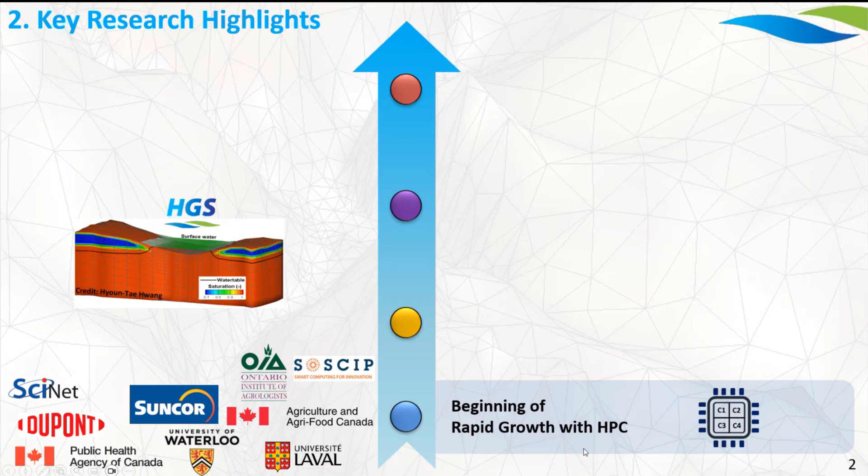This is my PhD work. It's been more than 15 years since I developed this parallel computing algorithm. At that time, we started to implement HydroGeoSphere in various real-world applications with large-scale models, such as the Canadian continental scale model. The complexity of the model was greater and greater, which required higher computational demand. So we needed to develop a more computationally efficient model by implementing high performance computing.

So we developed the parallel computing algorithm, which is kind of normal now, but at that time it was not that common. Now we are easily utilizing our computing machines with multi-cores.

The detail of this parallel computing is fairly simple. I developed a privatization scheme with array chopping that splits the matrix into the number of cores. Each core works on its own chunk of the matrix instead of using the whole matrix. That is what I call a privatization scheme with array chopping.

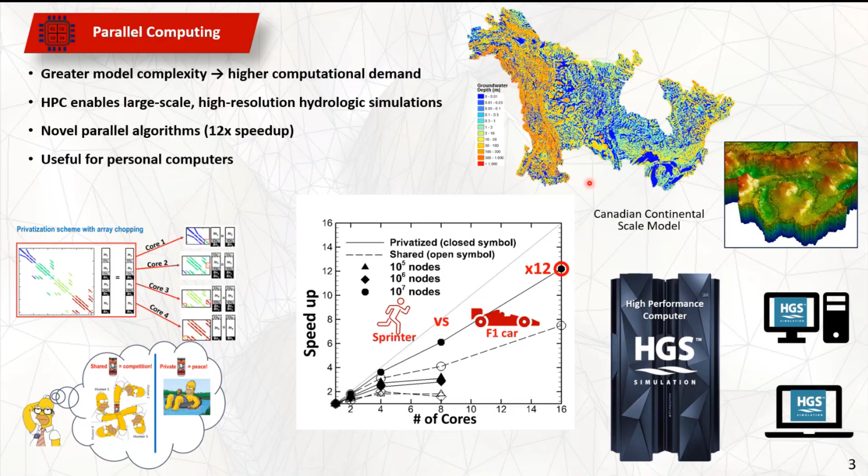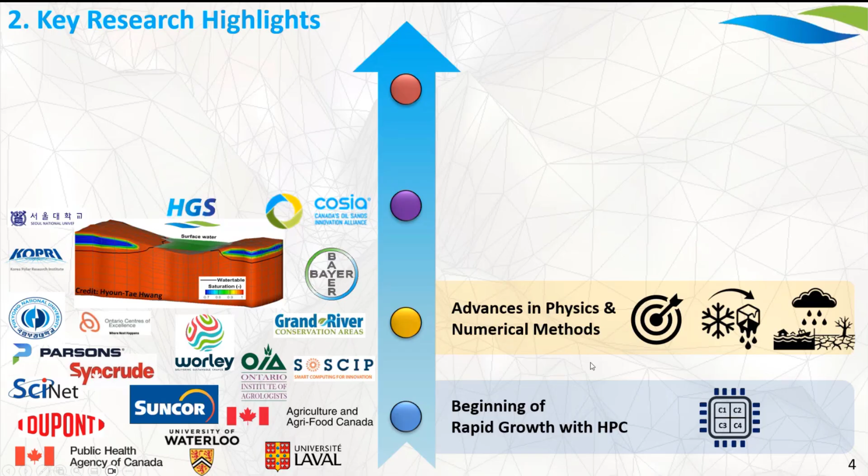So the next phase is to implement more physics and understand the detail of phenomena in nature. We advanced the physics and implemented additional numerical methods. The main examples are source zone identification, freezing-thaw processes, and climate change impact analysis.

First, we can look into source zone identification. We expanded the backward probability model to improve computing efficiency and accuracy of source identification. It was mainly focused on groundwater systems in 2D, but we expanded that to a 3D model with a variably saturated zone.

The backward probability model is literally opposite to the forward model. The forward model starts from the source zone - which we don't know - runs solute transport, and then detects the concentration at the monitoring well. The backward probability model instead starts from the monitoring well, where contamination is detected, runs the simulation, and traces back to the source or origin of contamination. This makes it easier to identify the source zone since we simply start from the monitoring well. But the forward model actually takes a lot of time because we don't know the exact solution.

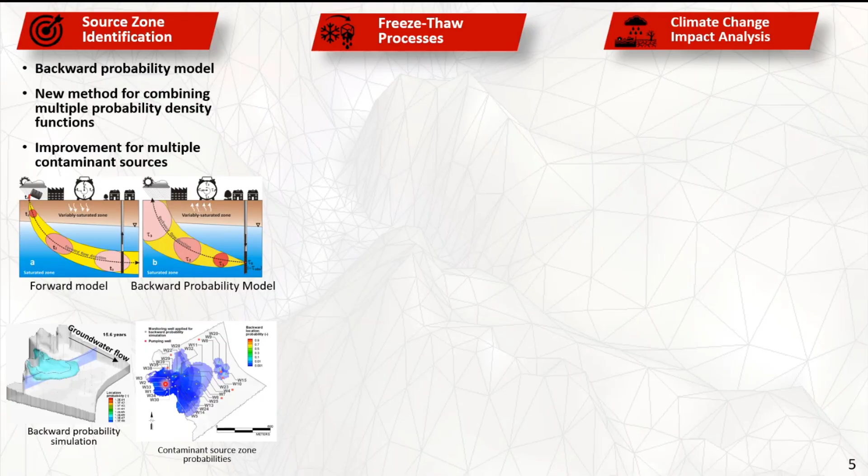This is one example of a backward probability model. You can see it representing the source of contamination and moving backward upstream, opposite to the groundwater flow direction. The final result is a probability map of the contamination, where dark blue and red represent high probability of the source zone. We can overlap multiple backward probability model simulations to identify the highly possible contamination sources.

Next is physical processes - unique physics we implemented for identifying active layers in Antarctica. The active layer is frozen during winter and acts as a groundwater aquifer during the summer season in Antarctica. This is a very important layer connected with surface water and groundwater systems in our cold region.

In order to estimate the active layer in Antarctica, we collected samples at Barton Peninsula, Antarctica, and performed lab experiments in the cold system. We calibrated this column test and then applied the calibrated model to Barton Peninsula, Antarctica.

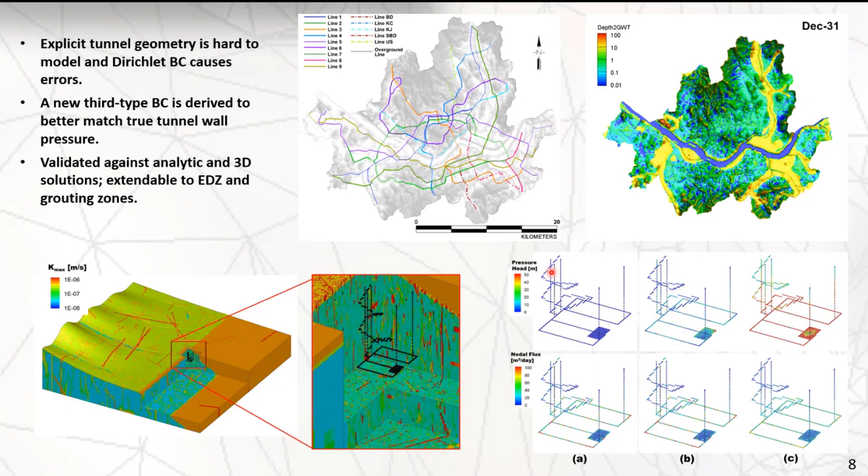The next example is nuclear waste repository construction. You can see these lines representing the tunnel boundary condition. These are tunnels leading to the nuclear repository system, this is the nuclear repository, and these are the tunnel pathways to it. This approach was successful in estimating groundwater seepage through tunnel, so they can prepare the drainage system and groundwater discharge system during construction.

The next example is water management. This time we develop for anthropogenic activities, which create new systems such as sprinkling, water distribution, and dam operation. These are not natural, so we need to implement new boundary conditions. To represent this water distribution system, we developed a boundary condition that links one boundary condition to another boundary condition.

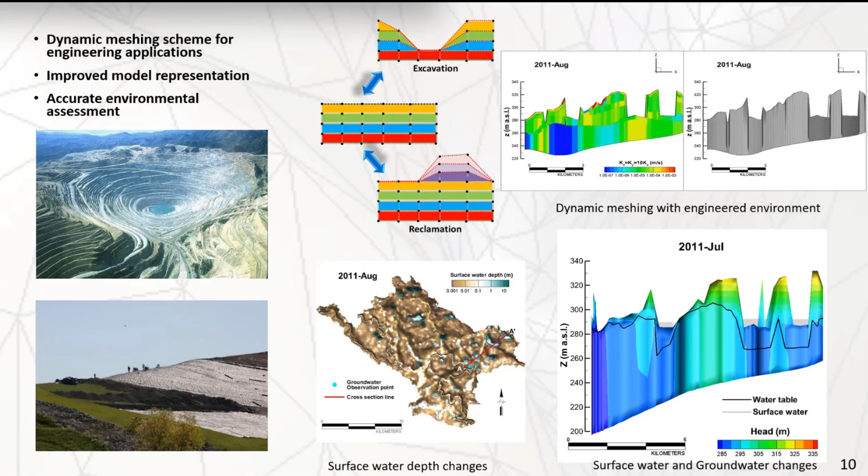And you can see the cross section of this area. Then you can see the dynamic interactions between the surface water and groundwater system during the excavation and reclamation stages. So this way we can simulate these two main processes continuously, and at the same time we can also estimate the dynamics between the surface water and groundwater system.

Then we set up the site scale model with a heterogeneous field, and also perform the uncertainty analysis of the model, because there is non-uniqueness, and also in the calibration the number of observations is not enough for identifying the exact model. So we need to perform the uncertainty analysis of the model. Then, based on the uncertainty of the model, we perform the risk analysis of the radionuclide.

If there is a leak of the radionuclide into the groundwater system, we can simulate and provide the range of this radionuclide concentration at different locations. At the same time, we can also provide the main behavior of the radionuclide through the variably saturated zone and the groundwater system. This information is very important for the groundwater or radionuclide management team for setting up new policy if there is a radionuclide leak.

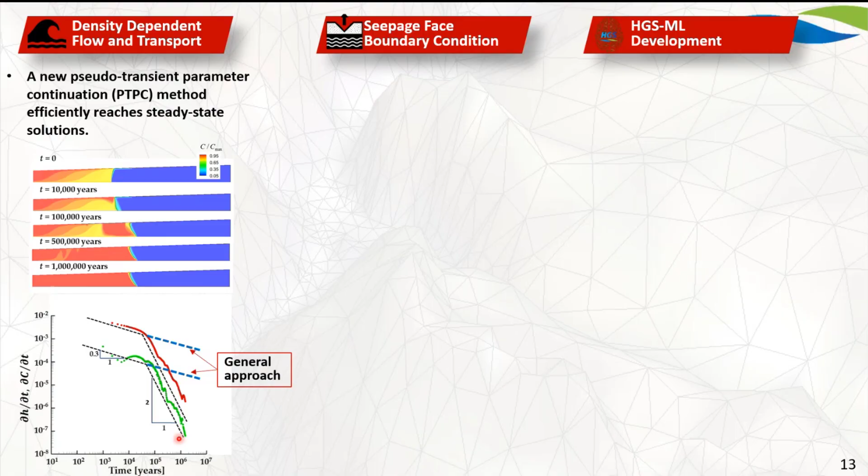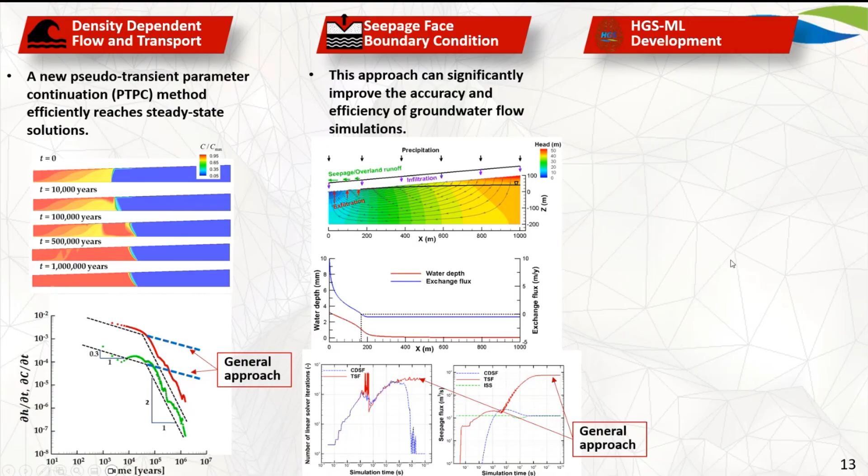However, our approach is quicker and stabilizing, and provides almost accurate simulation results compared to the integrated surface-subsurface model.

And the next development is the HGS machine learning model. Currently we try to implement a machine learning framework combined with HGS, to improve the accuracy of the model and, at the same time, improve the computing efficiency using machine learning.

So we try to implement this HGS machine learning framework to this California state model. So on the left side, the ocean side, we run a density-dependent model to identify the seawater intrusion areas on the coastal areas, so San Francisco Bay and LA and Santa Barbara. So we actually set up some kind of seawater intrusion warning system on the coastal side.

And on the land side, we also try to implement the groundwater warning system. There are significant problems in San Joaquin Valley, so groundwater resources are very important in this area. So by implementing this HGS machine learning framework, we can improve the computing efficiency and accuracy of the model. So the ultimate objective is implementing this framework to set up the digital twin system.

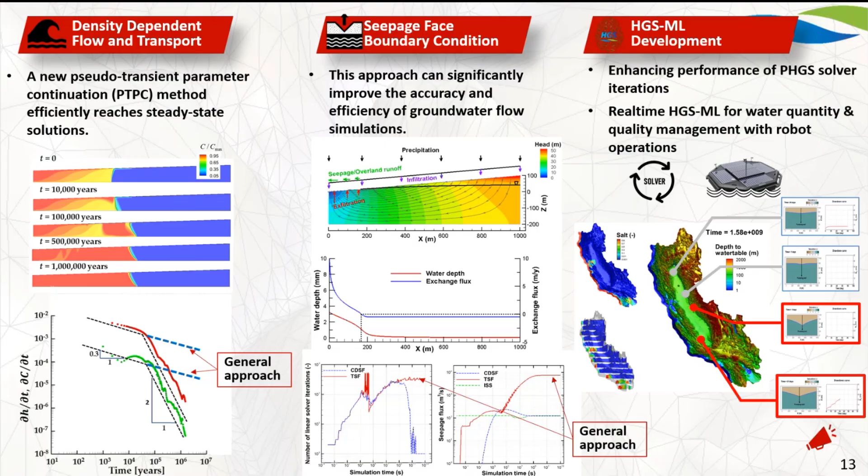Yeah, so in summary, HydroGeoSphere has evolved through high performance computing implementation, advances in physics and numerical methods, improving the workflow, and also advancing the computing performance. So yes, we still put lots of effort into improving the computing efficiency and also accuracy of the model.

The other one is related to a mining project that is trying to extract sand from a sand aquifer. The problem is also related to this tunnel problem, because we expect that when you remove sand from the aquifer, you're changing the density of the soil matrix. There is a possibility of movement of the sand inside the aquifer. And I wanted to know how these two new tools that you have implemented would connect to those two particular problems. And I thank you for your time.

Yeah, thank you, Ricardo. Yeah, so that is actually a good question. So the first, for the question related to water management. So yeah, definitely, the site scale and larger scale problems are quite different.

And also when we apply to the larger scale, there are lots of complexities involved with this larger scale model. At that time, we may need to simplify the complexity of the model, and then we can implement the complicated water resources management system to the larger scale model. So the site scale model is a bit simple, but if you want to see the detail of this heterogeneity and also the water resource management system, then it probably requires a huge amount of

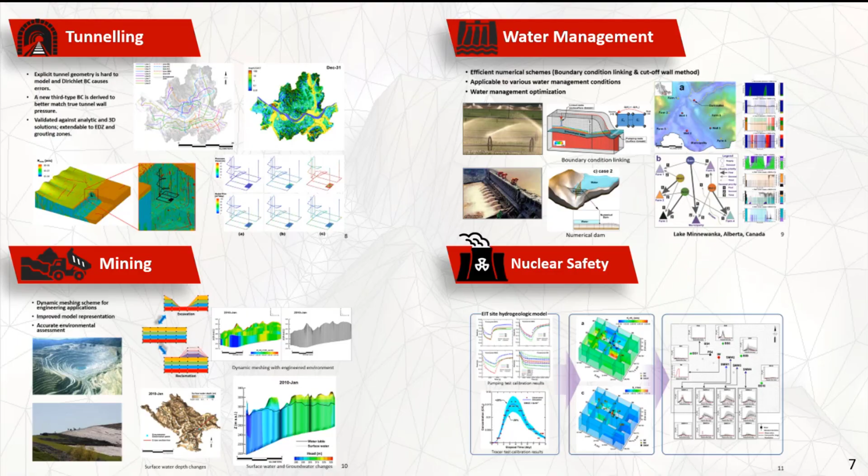So that is actually a very important question regarding the uncertainty of the model. Here, I provide one example for risk assessment of a radionuclide leak from a nuclear power plant or hazardous facility. These steps are very important: calibration using field or lab experiments, then set up the site scale model, and then run the risk assessment. But this risk assessment involves what if scenarios, such as storms, droughts, anything. It is very important to estimate the risks for any conditions, because it is a very important facility for public health.

In that case, we don't know the exact parameter set. That's why we perform the uncertainty analysis based on the calibrated model. After calibration is done, it is necessary to perform the uncertainty analysis of the model. Based on the calibrated parameters, each parameter has a range of values, from the minimum value to the maximum value. So we assign these ranges to the model, then perform the uncertainty analysis.

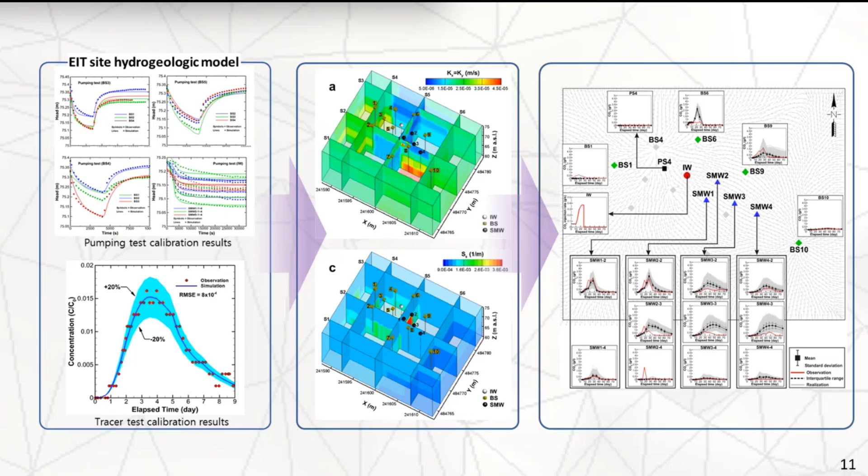Yes, this one. Okay, I can look back to the slide. Sorry about that, go back to the slide. The backward probability model. Yeah, that is also a good question. So here in this case we actually focus on groundwater. Sorry, I noticed that my screen is not shared. Oh yeah, sorry about that. All good. So now I show my screen.

Perfect. Yes, in this case we focus on the groundwater system and also expand to the variably saturated zone. So definitely we can identify the source of contamination in a variably saturated zone. This one is only focusing on a groundwater system, a subsurface system, including the variably saturated zone and saturated zone as well, but not linked to the surface water system.

Definitely, we are planning to expand this backward probability model to the integrated surface-subsurface model. So maybe for a simplified model, you can just simplify the model by applying the river stage. No need to run a surface water system. Just assume the subsurface model only, and then on the bottom of the stream line, you can assign the contamination or something like that.

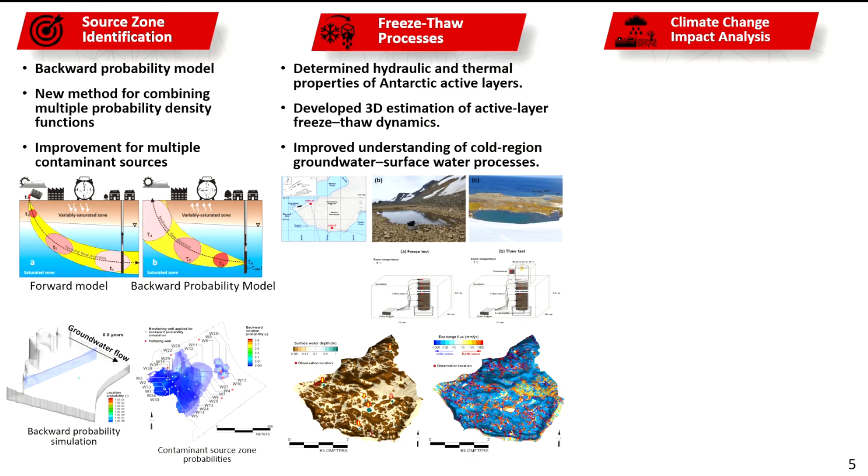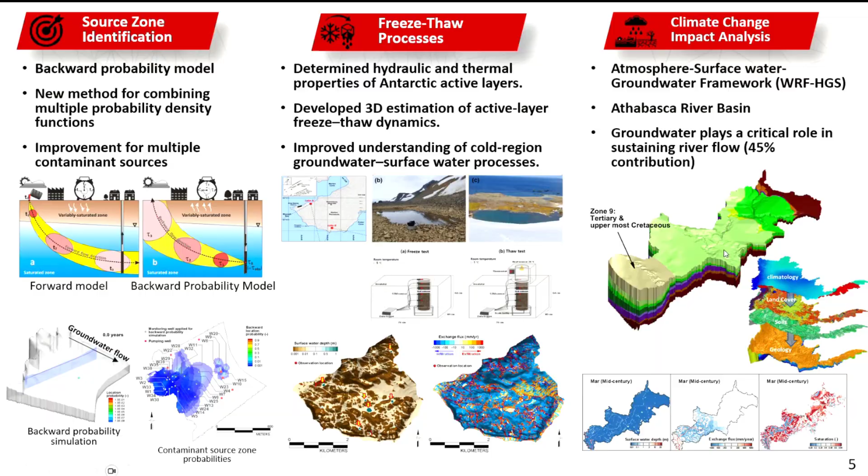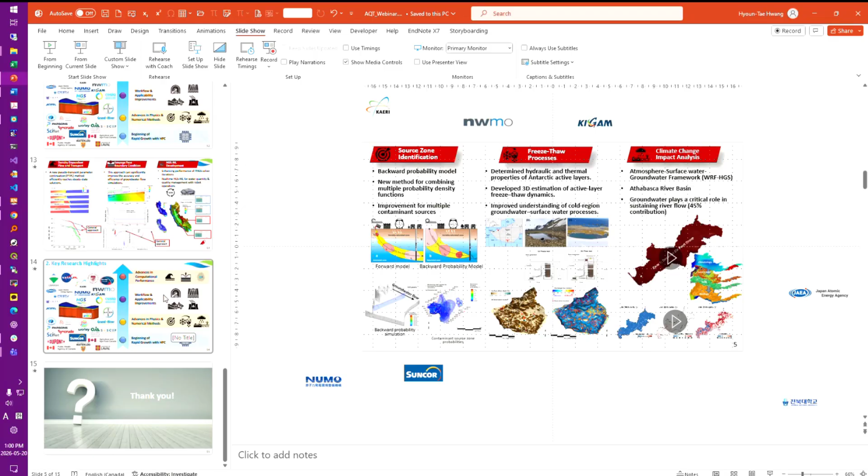If the bank storage is highly permeable, then definitely the interactions between the reservoir and bank storage are very strong. If the material is highly impermeable, then probably not that strong an interaction. But in this case, the numerical dam, we assume there is no strong interaction between the reservoir and the dam block.

The numerical dam we developed here just blocks the water, so no interaction between the dam and the reservoir, no water leaks from the dam blocks, but there is a definite discharge point here. Then we can use a boundary condition linking the reservoir to the downstream location.

Thank you. Perfect. I don't see any other questions in the chat. Oh, I think we might be getting more. Yep, perfect. I think that's it.